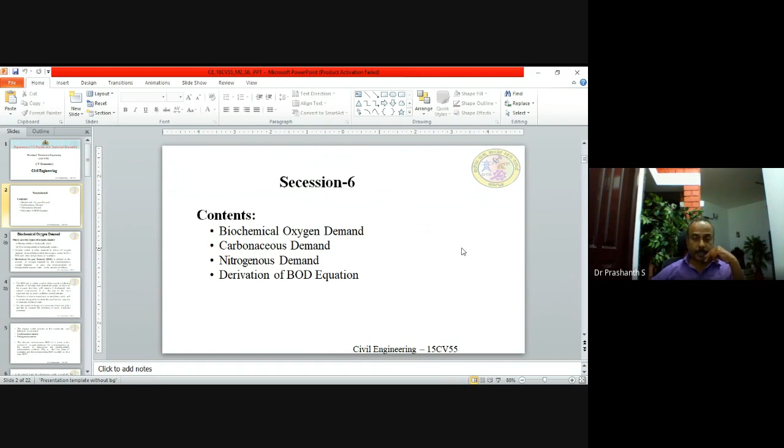And today I'm taking up Municipal Wastewater Engineering 18CV55. Here we are going to discuss session 6. The contents which we are going to discuss under session 6 are biochemical oxygen demand, also called BOD, which is one of the important chemical characteristics of sewage. And under the oxygen demand, we are going to discuss what is carbonaceous demand, nitrogenous demand, and derivation of the BOD equation.

Coming to biochemical oxygen demand, there are two types of organic matter in sewage. One is biodegradable and another one is non-biodegradable. Organic matter is often assessed in terms of oxygen required to completely oxidize the organic matter to carbon dioxide, water, and other end products of oxidation.

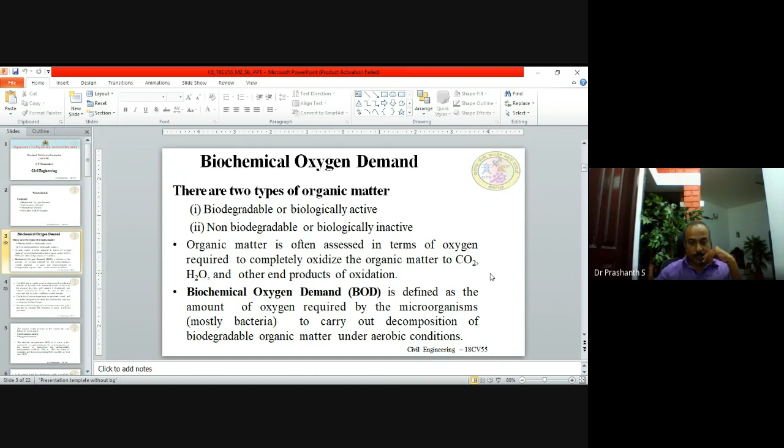Therefore, biochemical oxygen demand is defined as the amount of oxygen required by the microorganisms, mostly bacteria, to carry out decomposition of biodegradable organic matter under aerobic conditions. The BOD test is widely used to determine the pollution strength of domestic and industrial waste in terms of the oxygen that they will require if discharged into natural water courses.

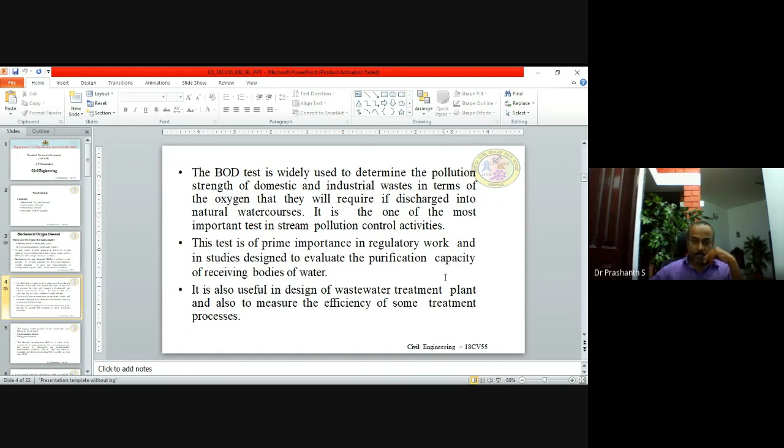It is one of the most important tests in stream pollution control activities. This test is of prime importance in regulatory work and in studies designed to evaluate the purification capacity of receiving bodies of water. This BOD test is also helpful in design of wastewater treatment plants and also to measure the efficiency of some treatment processes.

The organic matter present in the wastewater may belong to two groups. One is carbonaceous matter and another one is nitrogenous matter. The ultimate carbonaceous BOD of a waste is the amount of oxygen necessary for microorganisms in the sample to decompose the biodegradable carbonaceous material. This is the first stage of oxidation and the corresponding BOD is called first stage BOD. In the second stage, the nitrogenous matter is oxidized by autotrophic bacteria and the corresponding BOD is the nitrification demand.

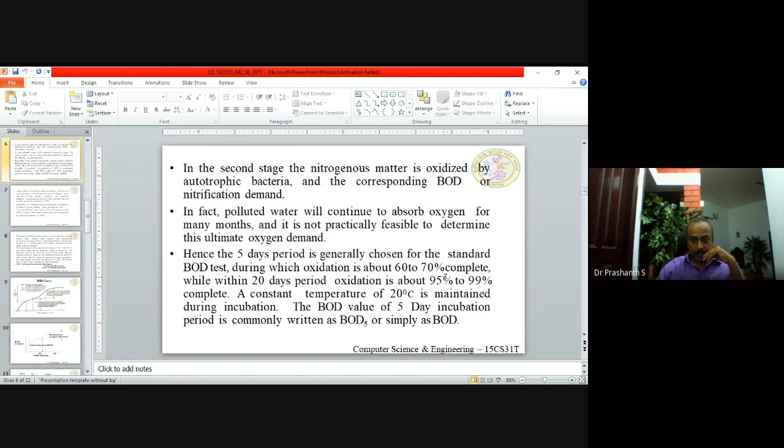In fact, polluted water will continue to absorb oxygen for many months, and it is not practically feasible to determine this ultimate oxygen demand. Hence, the 5-day period is generally chosen for the standard BOD test, during which oxidation is about 60 to 70% complete, while within a 20-day period oxidation is about 95 to 99% complete. A constant temperature of 20 degrees Celsius is maintained during incubation. The BOD value of the 5-day incubation period is commonly written as BOD5 or simply as BOD.

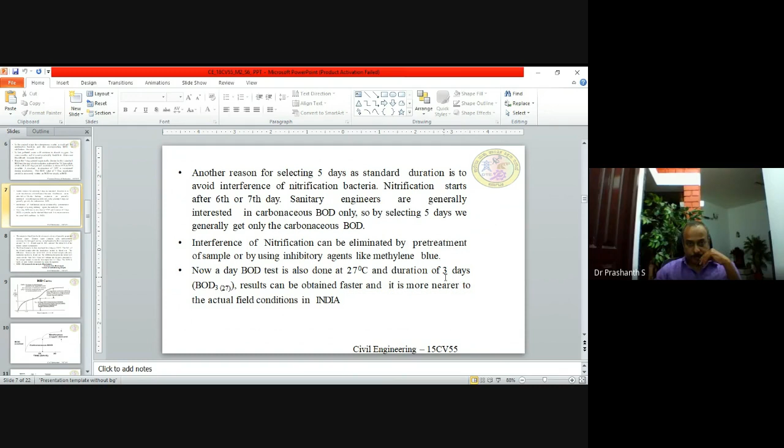Another reason for selecting 5 days as the standard duration is to avoid interference of nitrification bacteria. Nitrification starts after the 6th or 7th day. Sanitary engineers are generally interested in carbonaceous BOD only. So by selecting 5 days, we generally get only the carbonaceous BOD. Interference of nitrification can be eliminated by pre-treatment of the sample or by using inhibitory agents like methylene blue, etc.

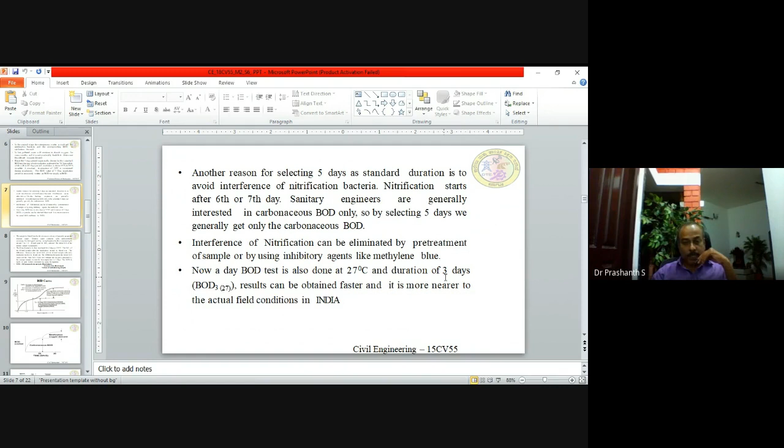Nowadays, the BOD test is also done at 27 degrees Celsius for a duration of 3 days. Results can be obtained faster and are nearer to the actual field conditions in India. This is how they do the BOD test. The sample is diluted with a known volume of specially prepared dilution water. Dilution water contains all types of nutrients and salts necessary for the biological activity and phosphate buffer to maintain the pH around 7 to 7.5.

Diluted water is fully aerated. The initial DO of the diluted water is measured. The diluted sample is then incubated for 5 days at 20 degrees Celsius. The DO of the diluted sample after the incubation period is found out. The difference between the initial and the final value indicates the oxygen consumed by the sewage sample in aerobic decomposition in 5 days. So the equation is: BOD is equal to DO consumed in the test by the diluted sample into volume of the diluted sample divided by volume of undiluted sewage sample.

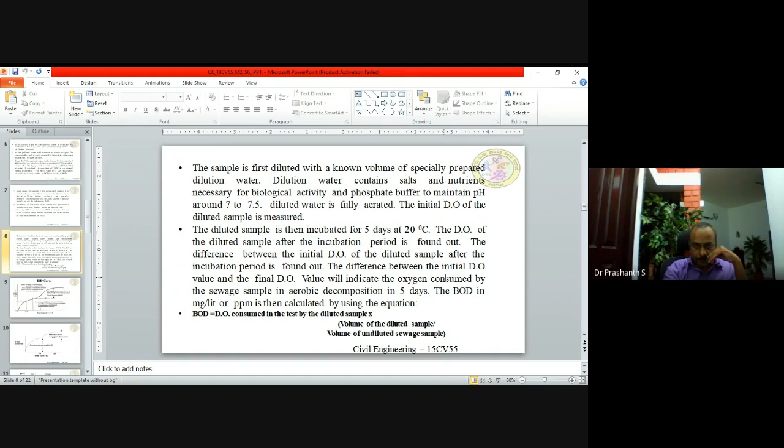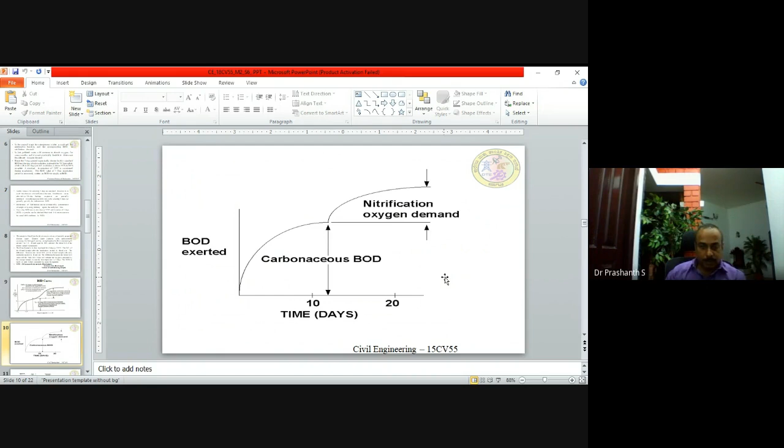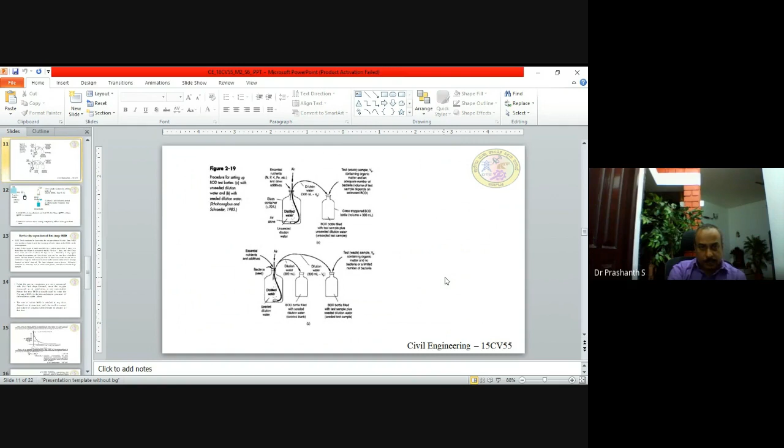And this is also another figure, BOD exerted versus time. So within 5 to 10 days, most of the carbonaceous matter demand will be done, and after that, the nitrification oxygen demand starts. So this is the figure of BOD testing. This is how they do the test.

Coming to the mathematical representation of the first stage BOD, or the biochemical oxygen demand: the BOD test is conducted to determine the oxygen demand for the first 5 days on a number of samples, and their average value is taken as the BOD5 at temperature. In fact, if the oxygen is made available for a period of more than 5 days, it is found that oxygen is consumed rapidly for 6 to 7 days and then slows down until the end of about 20 days or so.

Thereafter, it may again accelerate for some time and slow down to a very low rate for an indefinite period. The first demand during the first 20 days or so, in fact, occurs due to oxidation of organic matter and is called carbonaceous demand or first stage demand or initial demand. The later demand occurs due to biological oxidation of ammonia and is called nitrogenous demand or second stage demand.

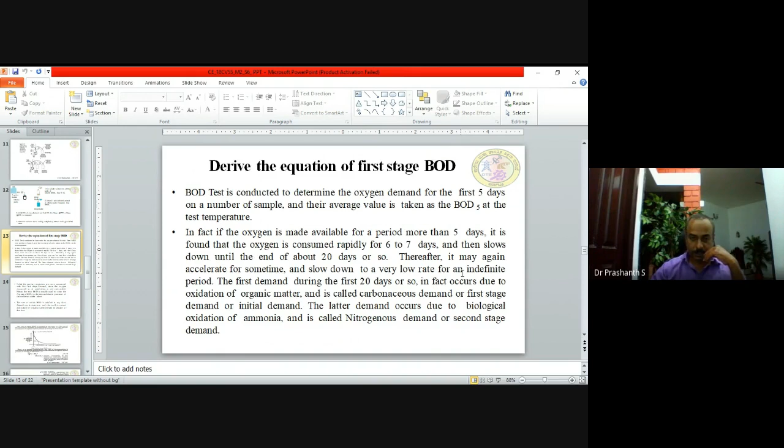In fact, the sanitary engineers are more concerned with the first stage demand since the oxygen consumed in its satisfaction is not recoverable. Hence, the term BOD is usually used to mean the first stage BOD, that is, the demand due to the presence of carbonaceous matter alone. The rate at which the BOD is satisfied at any time depends on temperature and also on the amount and nature of organic matter present in sewage at that time.

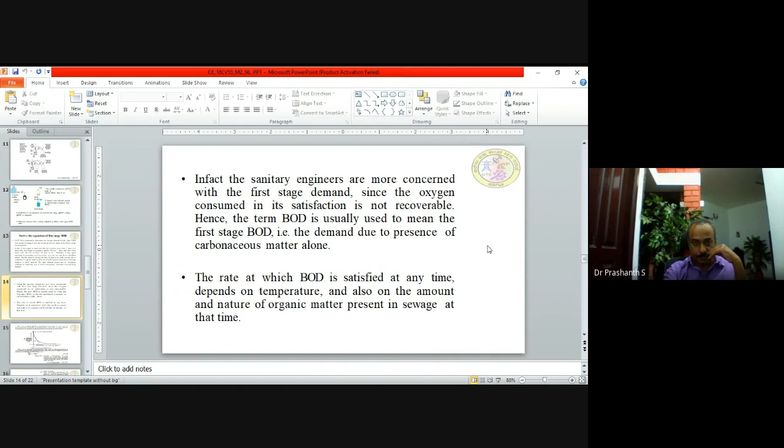Here, the amount of organic matter exerted with respect to time has been plotted as a curve. The rate at which the BOD is satisfied at any time depends on the temperature and also the amount and nature of organic matter present in the sewage. So at t equal to 0, all the organic matter is present. As the time passes, organic matter is reduced.

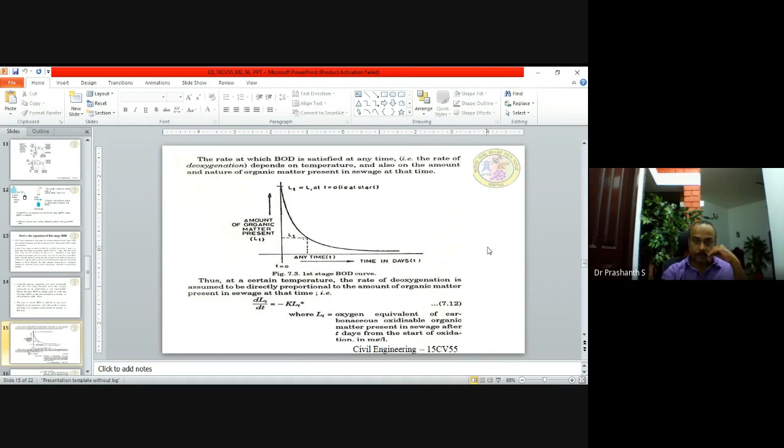Thus, at a certain temperature, the rate of deoxygenation is assumed to be directly proportional to the amount of organic matter present in the sewage, so it can be mathematically written as dLt by dt is proportional to Lt, with a constant called K, minus as it is decreasing. So when you rearrange the things and integrate, you get dLt by Lt, and if you take k outside and integrate dt, you get t plus c. Your constant of integration can be evaluated using a boundary condition.

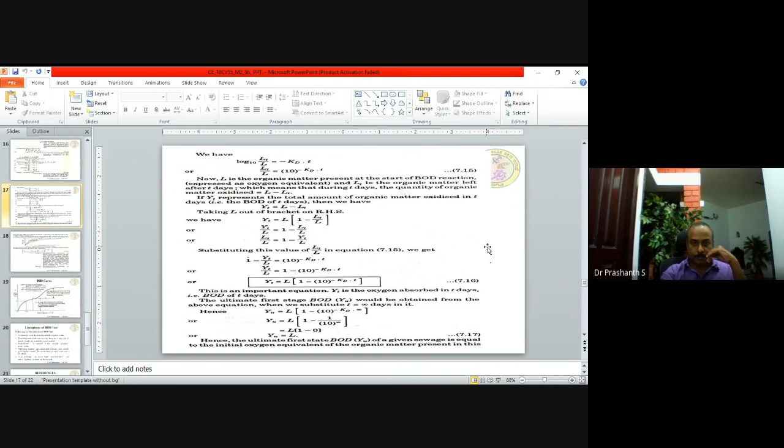So after doing all the mathematics, we end up with an equation, Yt is equal to L into 1 minus 10 to the power of minus KD into t, where KD is the rate constant. And the temperature correction for KD is given as KDT is equal to KD at 20 degrees Celsius into 1.047 to the power of T minus 20, which is the temperature correction.

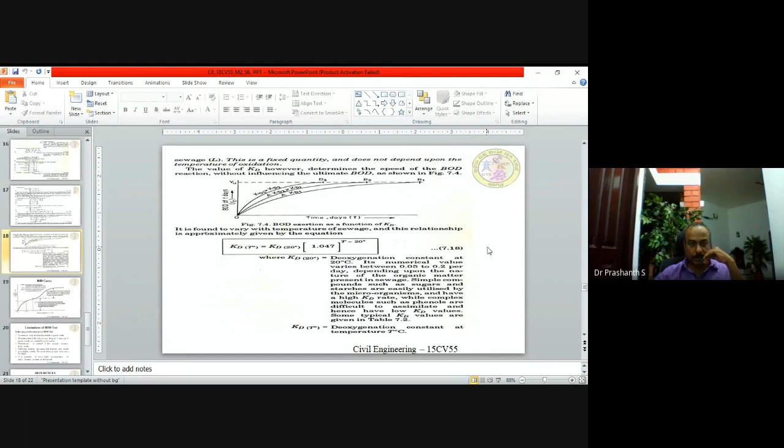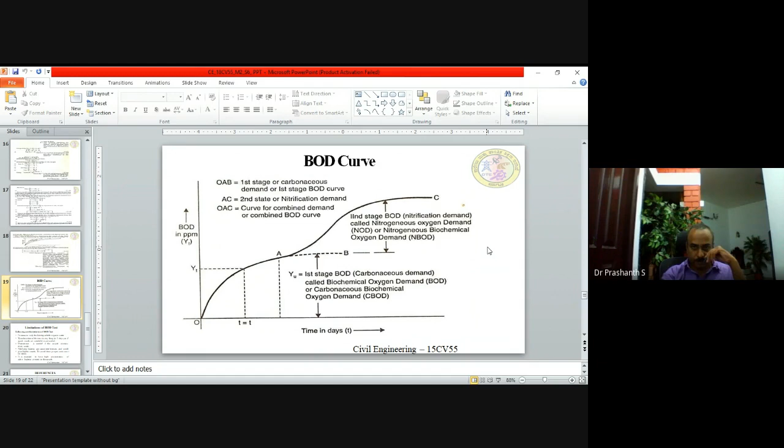So we have discussed biochemical oxygen demand. The test has got its own limitations. These are some of the limitations of a BOD test. The BOD test measures only the biodegradable organic matter and it is not going to measure the non-biodegradable organic matter. The time duration of the test is very long; it takes 5 days to find out the amount of organic matter. So when quick results are needed, this test is not useful.